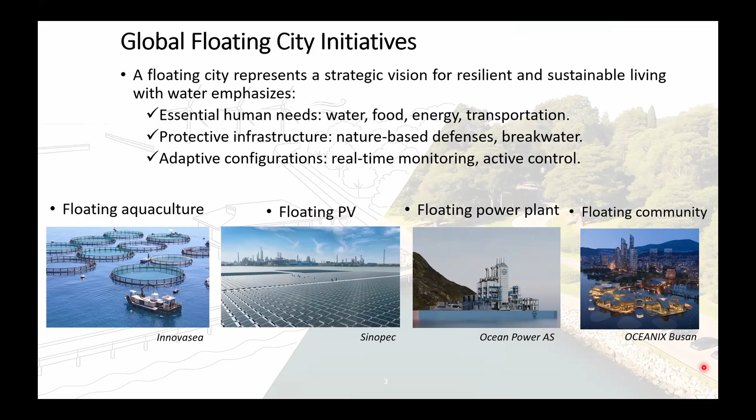However, the coastal environments are more complex than the inland system. And therefore, my question is how can we turn this complexity into practical solutions? So, my solution is to leverage the digital twin technology. The term digital twin technology was originally coined in the early 2000s, but the first practical application can be traced to the Apollo program.

And another good example is the Apple Watch. I don't have an Apple Watch, but I know that this device is collecting data and identifying our health condition through their numerical models. And more importantly, these data are not generic data, but personalized data that continuously update as my physical state changes. So it's like I have a twin in my watch, and it's digital, and that's why I call

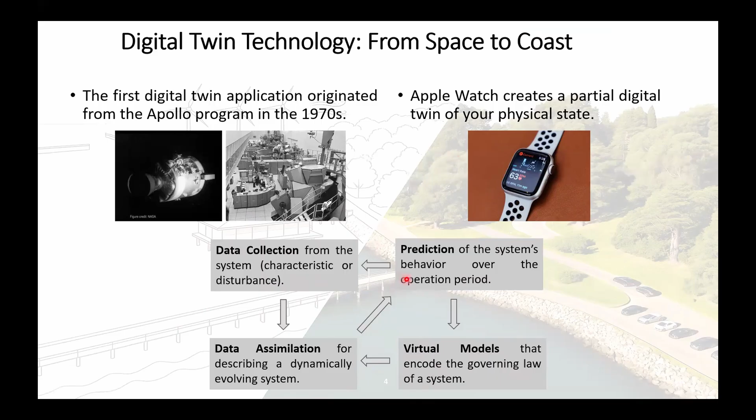it a digital twin. So according to this example, the key features of the digital twin are, first, the data collected from the system and the model that encodes the governing law of the system. And the process to combine these two components together is called data assimilation. And therefore, we can predict the system's behavior to provide a recommendation for further actions.

So similarly, we can build a floating city digital twin through the 4M framework. That's a name that I made up. So 4M is not 4 million, and it's also not another company like 3M. So first, there are high fidelity air-water flow models, so it stands for multi-phase.

And secondly, it has a multi-body dynamic solver, so it's multi-degree of freedom. And it can do fluid-structure interaction simulation, so it's multi-scale. And then finally, it has physics-based reduced order models, so it's multi-fidelity. I will explain this idea later, so that you kind of understand how we can apply the 4M framework.

And for the reduced order model, I'd like to make a special explanation: it's known as a surrogate model, and it's built to simplify the higher order model so that we can reduce the computational cost or accelerate the computational results. However, these reduced order models are usually system specific, which means they are tailored to capture the dominant dynamics of each application. And therefore, I will present our ROMs separately in the following three pilot, proof of concept studies. And meanwhile, I explain how I apply the 4M framework to verify the digital twins.

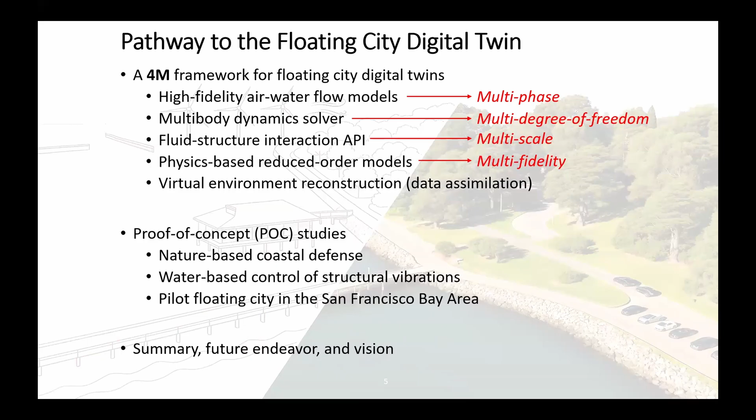And finally, I will show you some conclusions and future research directions. Okay, so let's jump to the 4M framework. The first module is focused on the high fidelity and the low order flow models, and this forms a physics backbone of our numerical wave tank. And we have three models to handle different scenarios from the high order to the low order. We have the multi-phase Navier-Stokes flow model, potential flow model, and the shallow water model.

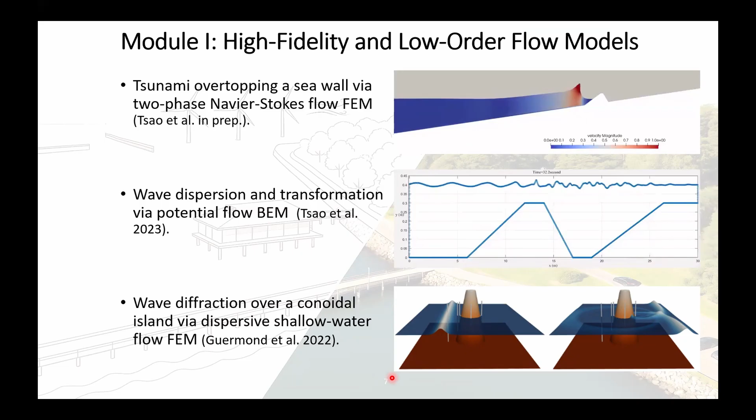So, for example, this is a tsunami overtopping the seawall solved by the two-phase Navier-Stokes model, and this is a wave transformation over a submerged bar, solved by potential flow, and this is wave diffraction over an island, solved by the shallow water flow model. And this module builds upon efficient finite element and boundary element methods to achieve scalable parallel performance, and they are well validated.

The second module is important because it's about how we can reconstruct the real world environment in the numerical models, which is called data assimilation. And here, the case that I show is about oceanography data, for example, the wave field, the wave height, the wave period. So say we got the wave data from a physical buoy and we want to replicate the wave condition in our numerical wave tank, we will apply the window method and the relaxation zone method.

The window method means that we extract the wave spectrum from the real wave time series, and the amplitude of each frequency component determines the amplitude of the predicted wave elevation. And then we can establish the relaxation zone. Sometimes we call it a numerical wave maker. In the relaxation zone, we add an additional term in the Navier-Stokes equation, so we can slowly build up the wave velocity to reach the required wave field.

So this picture shows that if the wave is highly random, then we need more frequency components to describe the wave. And because the accuracy of the spectrum is related to the duration of the time series, we have to make sure the record is long enough.

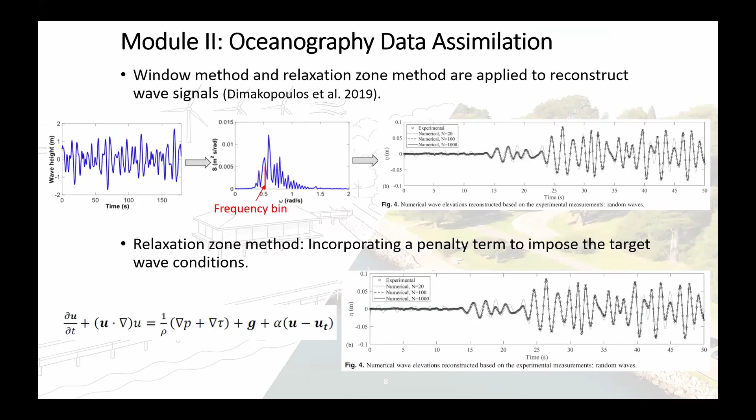And the next module is the hydrodynamic analysis in fluid structural interaction, where we focus on the pressure and force applied on the surface of a submersible structure. We've developed a pretty cool method called a cut finite element method.

The term cut means that we don't generate the mesh that is conform to the structural surface like traditional finite element methods, but we build a background mesh first, okay, and then cut out the mesh where you put your structure.

And this is extremely helpful when you are dealing with a structure with a complex geometry because you get to simplify the mesh generation. And additionally, we can avoid excessive remeshing work when frequent remeshing is required, like the large free surface deformation and the moving boundaries.

Okay, and this is an example showing you the advantage of CutFEM in reducing mesh work, because you can see how the mesh is directly cut into different sizes. However, because you cut the mesh, sometimes you get a very tiny mesh, like this, and it's bad for numerical accuracy and stability. So we need an extra numerical treatment to fix that.

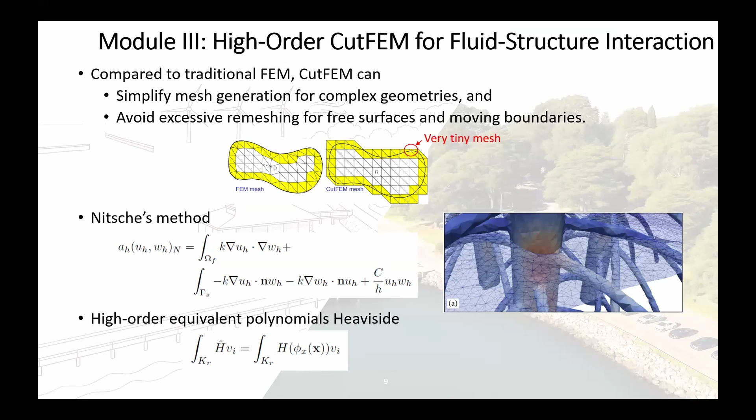So the next module is the dynamics of the multi-degree of freedom systems in fluid structure interaction. And it's important because most of the coastal and marine structures are dynamic systems. So this module creates an interface that exchanges variables between the CFD and the structure dynamics solvers.

And sometimes the CFD and structure dynamics solvers will give different solutions. For example, the displacements on the interface are not compatible, or the forces on the interface are not in equilibrium. This is because we need the structure's motion to be given as a boundary condition, but the structural motion is not known until you know the hydrodynamic force.

And therefore we need to use a strongly coupled iterative scheme, okay, to enforce the convergence of the kinematic and the dynamic conditions at a fluid-solid interface.

And when we get the pressure and the stress at the fluid-solid interface, it's pretty simple to solve the dynamics of the MDOF system, because the time marching step is usually stable. Okay, so a simple finite time difference scheme is available. And we've done some experimental validation of the elastic gate in a dam break problem.

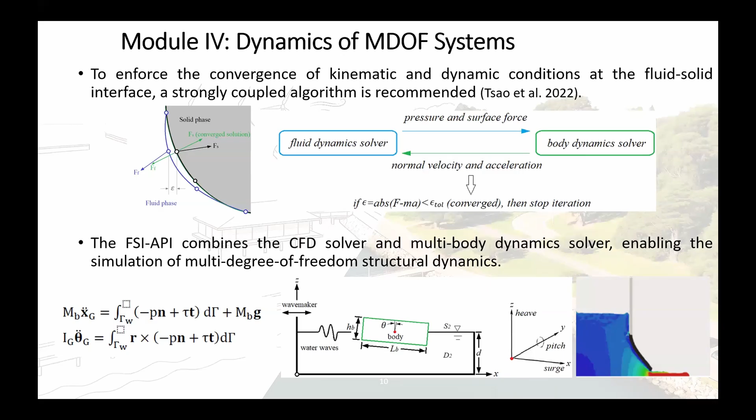So this elastic gate is actually modeled by multiple components that link together. All right, so I can show you some of the proof of concept studies that will be applied in the floating city digital twin.

So the first study is the natural shoreline protection, specifically the mangrove forest as a coastal defense. Our goal is to establish a numerical framework to estimate the drag and hydrodynamic damping of a mangrove forest and then further evaluate the resilient performance of natural shorelines. So this is an example of wave propagation over a mangrove forest.

This experiment was done by Oregon State University, where they built an artificial mangrove forest with a bunch of PVC pipes in their wave flume. And they measured the wave attenuation induced by different porosity settings, which is mangrove density, under different wave conditions.

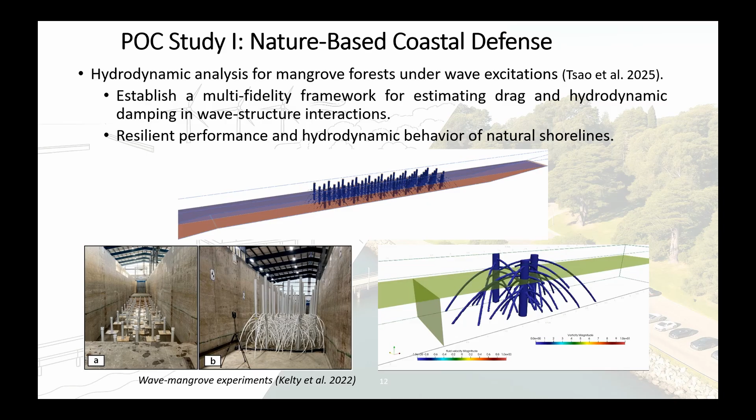So this is a result obtained using the two-phase Navier-Stokes solver with CutFEM. And you can see the vorticity distribution on the submerged surface, which means that we can analyze the wave damping during the fluid structure interaction.

Another challenge we faced was the wave flume is actually quite large. The mangrove forest is 60 feet long and 12 feet wide, and there's a lot of fake tree models inside. So it's impossible for us to run the full-scale simulation, which would eat up all our HPC quota. So we need a reduced order model of the mangrove forest.

Note that the ROM was derived based on a physical simplification. We assume the flow in the mangrove forest is in a Darcy-Forchheimer flow regime, and therefore we add a quadratic term in the momentum equation. This term is a sink, so it provides numerical damping to dissipate the wave energy. And now our problem becomes, what are the drag coefficients alpha and beta? To answer that, we conduct a regression analysis on the drag.

We first divided the tree model into several layers because each layer at a different height has different porosity, and in theory they will bring different damping effects. Then we input a uniform flow and calculate the drag, also by using the CFD model. So we can establish the drag-velocity relationship, and then we approximate this curve by a quadratic function. Therefore we can get the drag coefficients at the different heights as shown.

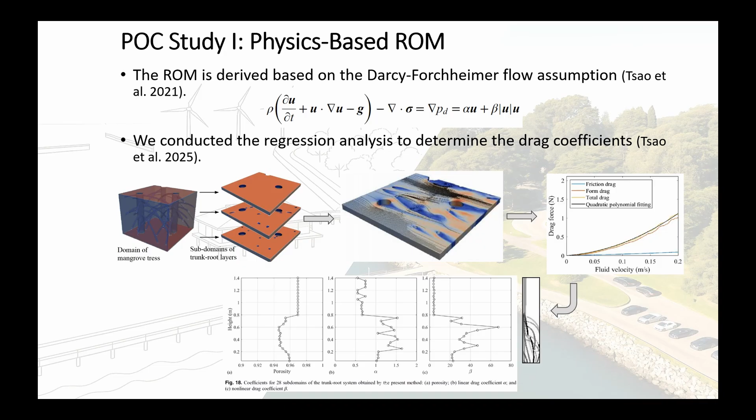When the Darcy-Forchheimer assumption is applied, what we actually do is model the mangrove forest as a porous media zone. You can see in the modified numerical wave tank, the mangrove forest is replaced by several layers of porous media with different drag coefficients. This area provides the same damping effect as the CFD model. One thing to keep in mind is that the ROM only includes the energy dissipation, so it cannot simulate the wave reflection and diffraction, so we have to correct the boundary condition of the porous media. This is quite important for 3D simulation, so it will be studied in the future.

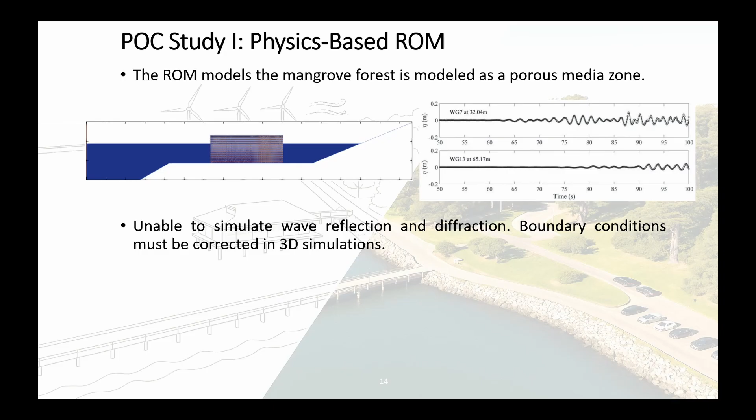The second POC study is about structural vibration control in water-based systems. We've improved the stability of the floating structure through a passive damper made entirely out of water. It is also known as a tuned liquid damper. As the tuned liquid damper is installed, you can see how much difference there is between the motions of the uncontrolled and the controlled platform. If you look closely, you will see that the sloshing fluid inside is creating an out-of-phase force that can cancel the wave force. The wave energy is then transferred to the sloshing fluid and dissipated through the sloshing damping.

Similarly, the water tank can also serve as a floating breakwater to protect coastal structures. In this simulation, the transmitted wave behind the floater vanishes because the wave energy is also dissipated by the water tank. And we can simulate the motion of the mooring lines, where each catenary line is represented by a series of bar elements, and then we can get the tension for further mooring analysis.

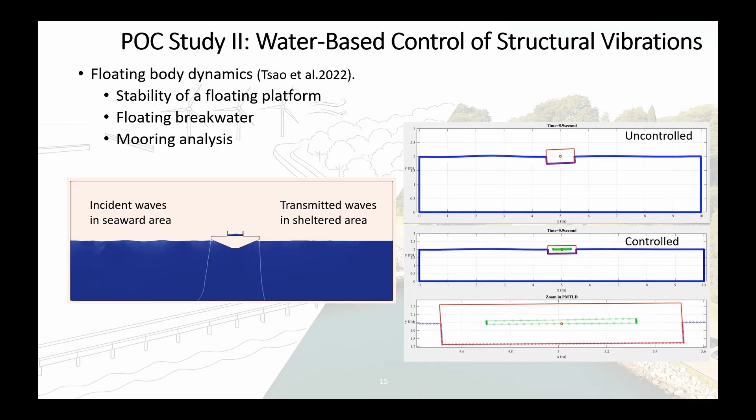We have also done another experiment to verify the design of the tuned liquid damper. This is the tuned liquid damper mounted on a pendulum subject to ground excitations, and we can always find the optimal dimensions and the associated material properties of the porous media inside the tank. Therefore, the tuned liquid damper will satisfy the tuning frequency and the optimal damping ratio given by tuned mass damper design theory, and the overall frequency response of the pendulum can be minimized as shown in this figure.

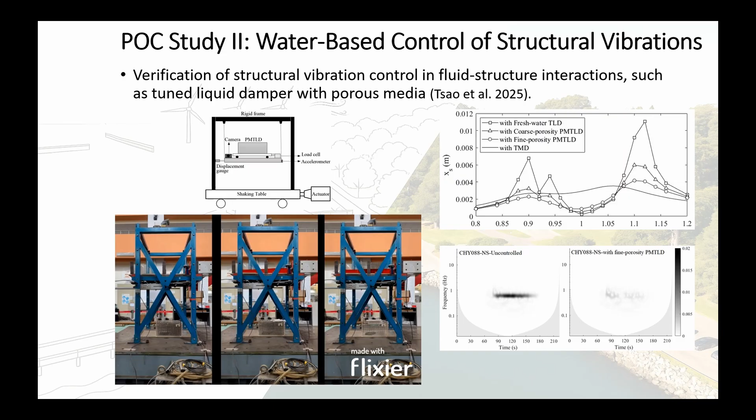From this video, you can see how the tuned liquid damper reduces the vibration of a pendulum, and the mechanism of the energy transfer and dissipation is the same as the previous example. Based on other research we've done before, although the free surface deformation can be large, the nonlinear sloshing force that comes from the convective term is actually somewhat insignificant. So it's negligible, so that we can also build a ROM for the sloshing fluid. I'll skip the derivation, but I can give you a very straightforward explanation.

The left-hand side equation is the free surface motion equation derived from linear wave theory, and the right-hand side equation is the motion equation of the mechanical system. You see how similar they are; both are second-order ODEs, and therefore we can transform a water tank into a multi-degree-of-freedom system, and their dynamic responses are equivalent. Each mass represents a sloshing mode, but since the fundamental mode is the most important, we can ignore the high-frequency modes, and finally we have a super simple model.

So the sloshing fluid in the tank can be represented by a mass with a spring and a dashpot attached to it. It's hard to believe, right? And we can characterize the nonlinear damping. So this ROM can be quite accurate in solving hydrodynamic effects in fluid-structure interaction. More importantly, you reduce the degrees of freedom of the free surface motion, making the computation super easy and fast.

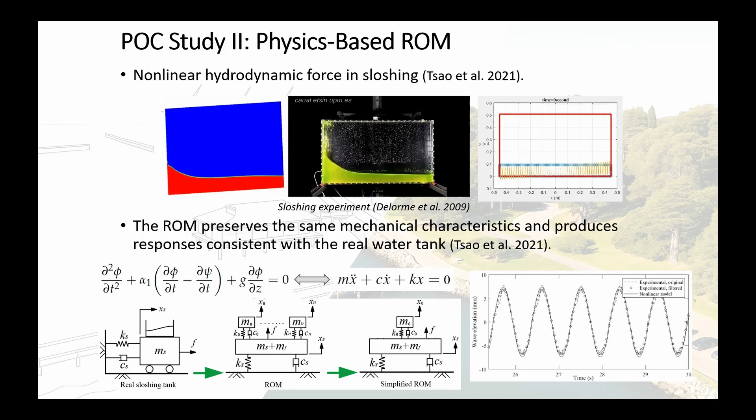So with all the data assimilation skills and the computational flow model and the fluid structure interaction solver, we're ready for a pilot floating city digital twin. And this is the Berkeley Marina in northern California. There's a renovation project to reopen the pier for recreational use. The original design is to build a sheet pile breakwater to create a sheltered water area for ship berthing. But it's also the perfect spot for some pilot testing.

And first of all, we've got to have the wave data. The data is collected from the CDIP buoys 142 and 41, these two yellow dots right here, one outside the Golden Gate, another one inside the bay. However, they are miles away from the site. If we directly use this data, our numerical domain will be extremely huge.

We can't afford that. So we go with plan B: we use a commercial software, MIKE 21, to simulate the wave condition near the Berkeley Marina. And then we assume the results from MIKE 21 are real wave data. In fact, there are no buoys right there, but we pretend that MIKE 21 is my buoy. Therefore, my virtual buoy defines the wave inputs such as wave height, peak period, and wave direction.

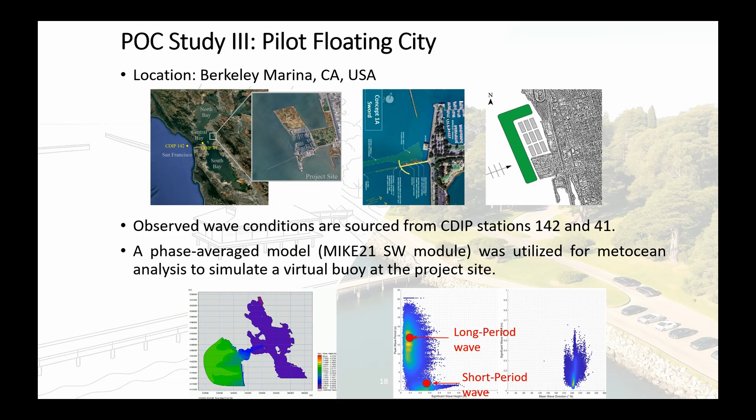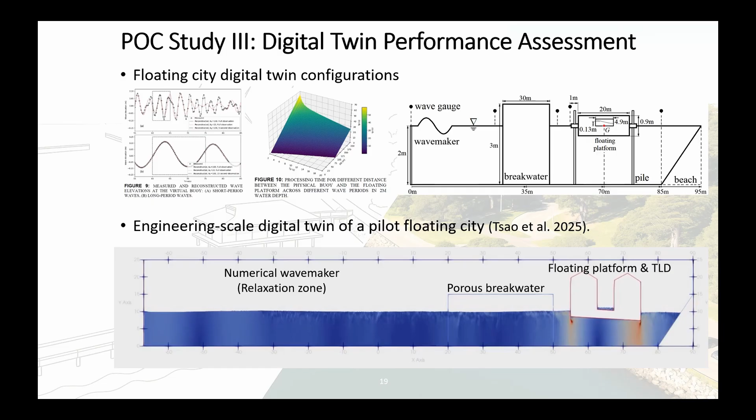And here we have our first floating city digital twin. We have a numerical wave maker that can reconstruct the real waves, a porous breakwater that can protect our floating house, an adjustable pile-supported floating platform for house installation, and a water tank that can serve as a floating breakwater or a drinking water reservoir. That's beautiful. So this model demonstrates the digital twin's potential to monitor and optimize structure design, and in the future to interact with the user in real time.

Next, I'm going to show you some of the ongoing and future research. The first ongoing research is structure data assimilation. One advantage of the solver is it can take fieldwork results. For example, this is the LiDAR point cloud of a real mangrove tree, and this image was taken in Florida by a student. We did some post-processing to clean up the tree model and then imported that into our numerical wave tank to run the wave-structure interaction simulation.

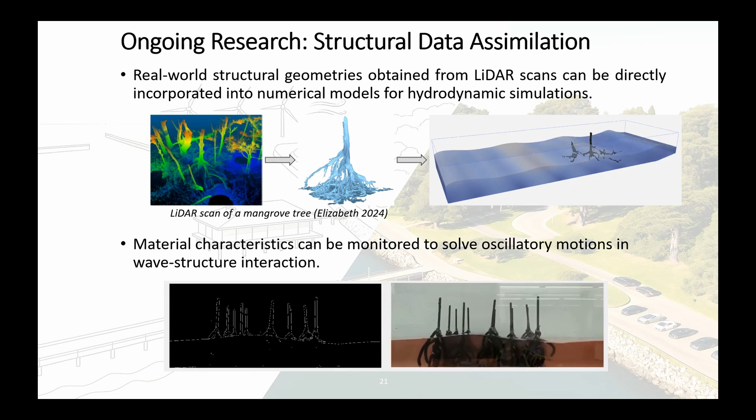And similarly, we can measure the material properties such as stiffness to solve the oscillation motion of the structure in waves. So if we monitor the characteristic change, we can adjust the numerical setting and enable an active control feature.

The second ongoing research is to improve the resilience of floating cities under extreme climate conditions. For example, what is the system's response under the wind-wave-current coupling effect? We have already done some hydrodynamic and aerodynamic analysis on floating solar panels. So our next step is to enable more comprehensive environmental reconstruction to improve the digital twin capability.

And more importantly, because traditional CFD is restricted for statistical analysis under varying meteorological conditions and physical settings, we have to quantify the uncertainty in the system. This also provides another way to develop the reduced order model of the floating structure.